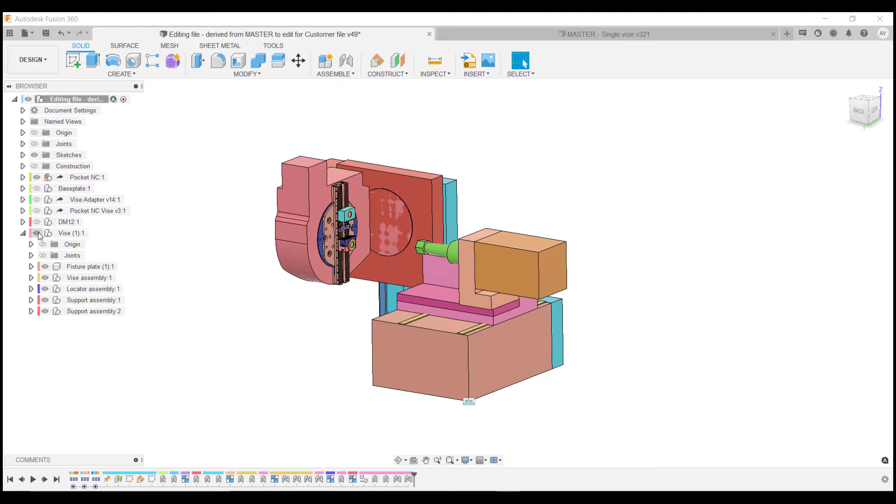Right, now I'll give you a brief overview of what's in the file and how it actually works. So I'll just hide that B-table offset sketch. First of all, you've got the Pocket NC itself. So I hide the Vise. That's the model that comes from Pocket NC. Hide that. Actually, I'll bring it back up.

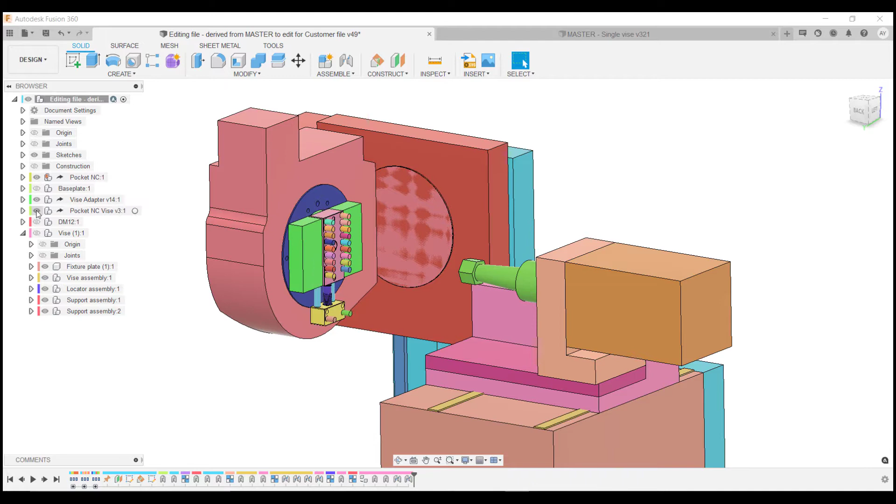Then you've got a base plate plus the DM12 dovetail fixture. I'll cover how that works in a separate video. And then you've got the Vise adapter and Pocket NC Vise, which are supplied by Pocket NC themselves. So even if you're not using my fixture plate, you can use this file for their Vise because it's all jointed and set up. So that just moves forward and back to grip a part.

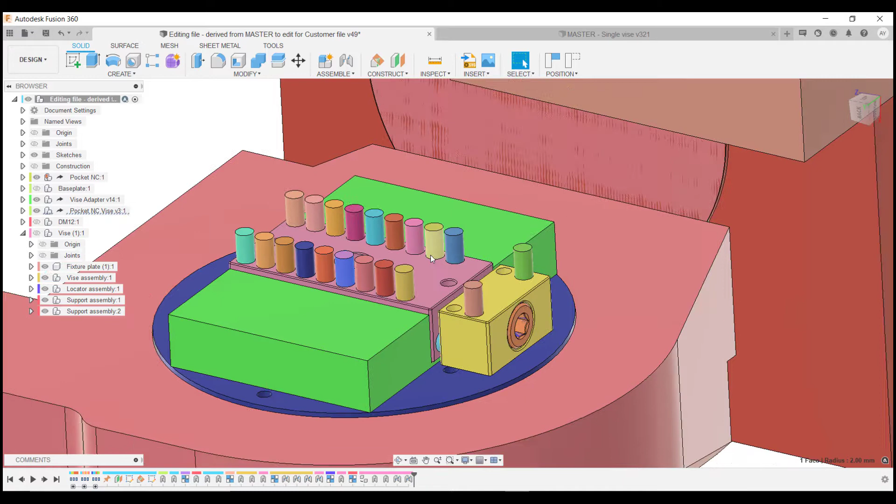And you'll find I've put these pins in, and you just hide them or make them visible as and when you need them. And then you've got my Vise. So if I hide the Pocket NC, the idea is that really you have to edit these last two joints to set this up. So you'll see they're fixed to the fixture plate, the teeth are fixed. The Vise moves like that, so everything you need is there.

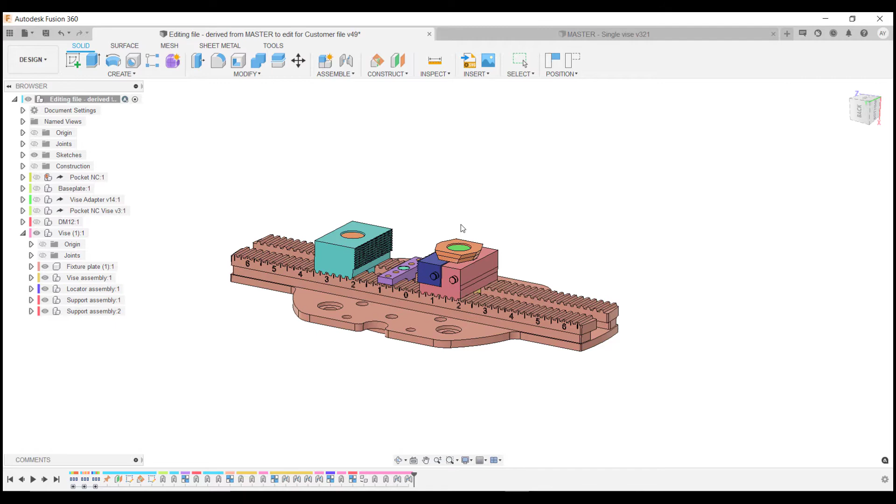You just have to set these last two joints, and what they're doing is just attaching the teeth at the corner on the Vise and on this component, which is called the locator, to teeth on the fixture plate. That's all it's doing. But the idea is that all the joints and everything are in here, so if for whatever reason you want to edit the file, you can. So I'll go through the individual components and the individual joints that you need to know about.

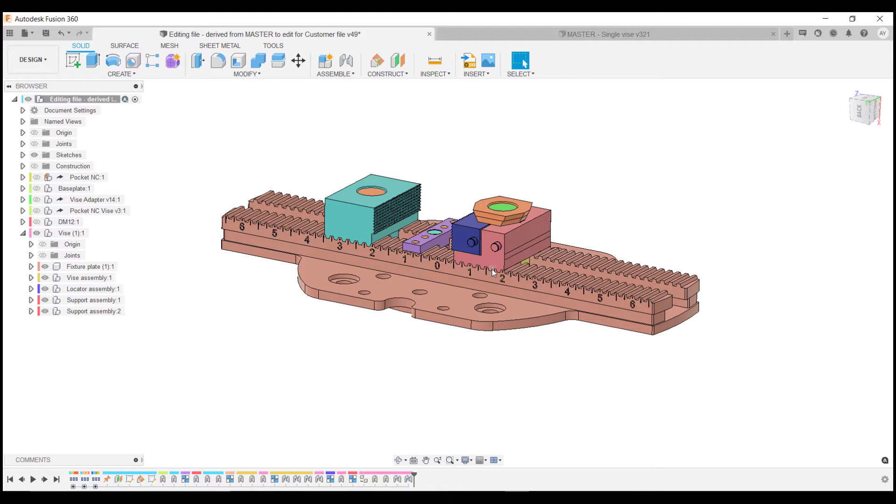First and probably most obvious is the fixture plate. Then there's the Vise Assembly, which is all the components for the moving Vise. So this is the moving part that grips on something. Then you've got the locator assembly, and then you've got two support assemblies. So the supports just go underneath whatever you're machining to stop it touching the fixture plate, so you don't potentially scuff up your fixture plate.

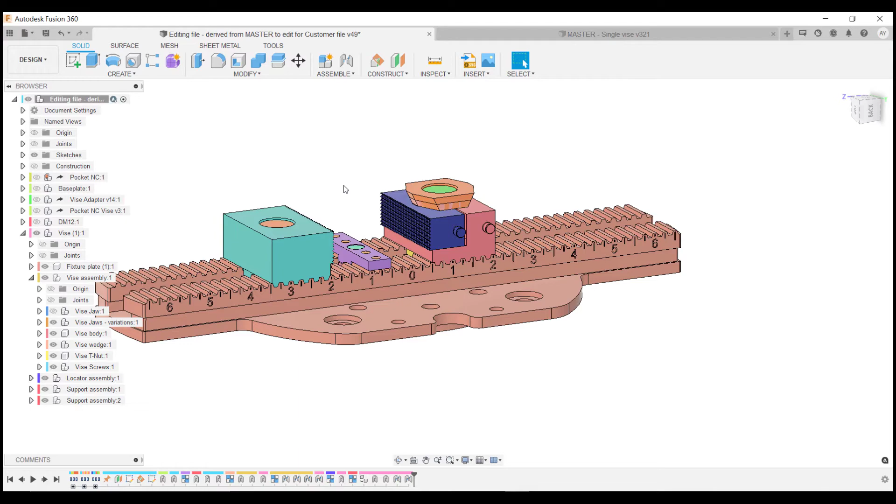So looking into the sub-assemblies in a bit more detail, you'll notice first of all you have a knurled jaw. So that's a gripper jaw made from steel, so it'll bite into whatever you're machining, and it'll ensure it won't move on the machine when you're cutting into it.

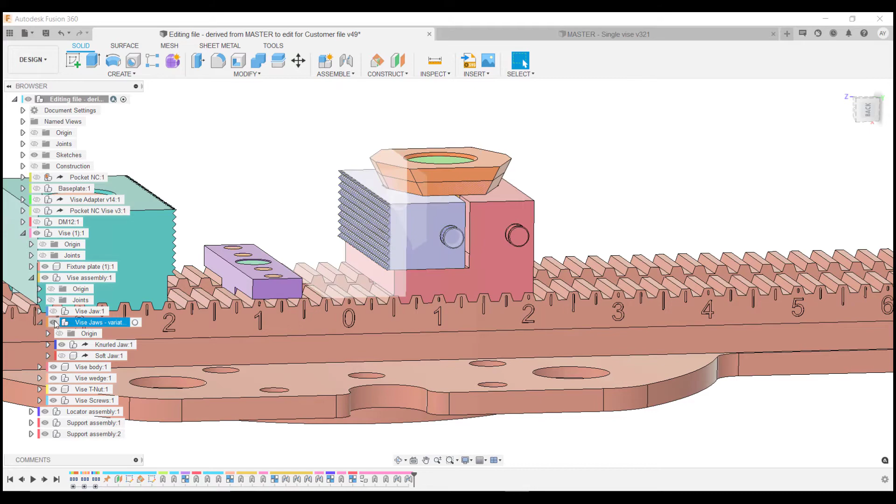You'll see that you've got several types of Vise jaw here. So you've got, if I bring this up, a bog standard flat jaw, which I don't actually sell. This is purely, I'll show you in another video, for setting up the Vise in CAD. It just makes life easier rather than trying to use this knurled jaw. And then you've also got a soft jaw. So two types of jaws really.

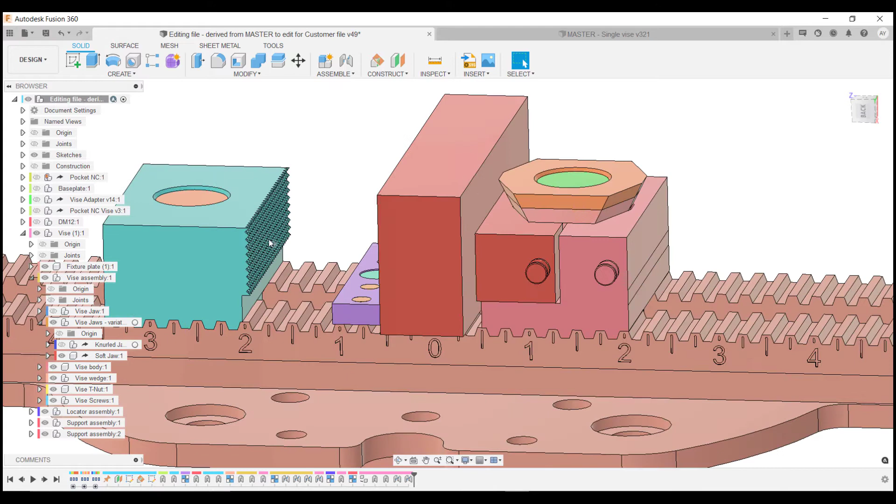There's the knurled jaw for gripping and preparing stock, kind of raw material. And then you've got this soft jaw which you machine into for doing second operations. And you'll see that the locator assembly has the exact same thing. So it's got this knurled jaw, and then it has a built-in soft jaw. The difference here is the locator, because it's one component, has it just built into the locator. So I'll quickly bring that up. There's the knurled jaw version, and there's the soft jaw version. So fairly simple.

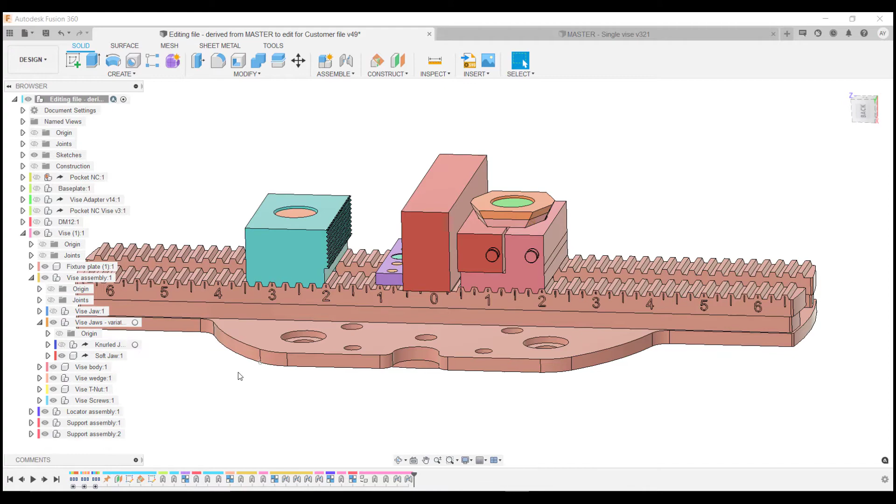Hide that again. So the Vise assembly is a bit more complicated because obviously it's got moving parts. If I undo these two joints, you'll see that they move forward and backwards. So the locator, everything is just what you'd call a rigid group. These are the symbols for rigid groups here. So it's all fixed together, and it's got a sliding joint, so it moves forward and backwards, and all you're doing with these final joints is just fixing the teeth. So that side's fairly simple. And the soft jaw version moves with it. I've closed it down, but you can see the soft jaw version comes up there.

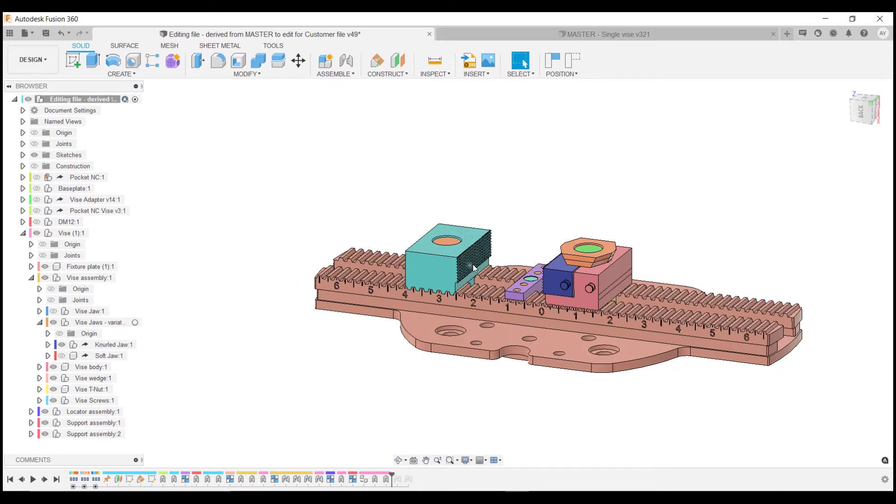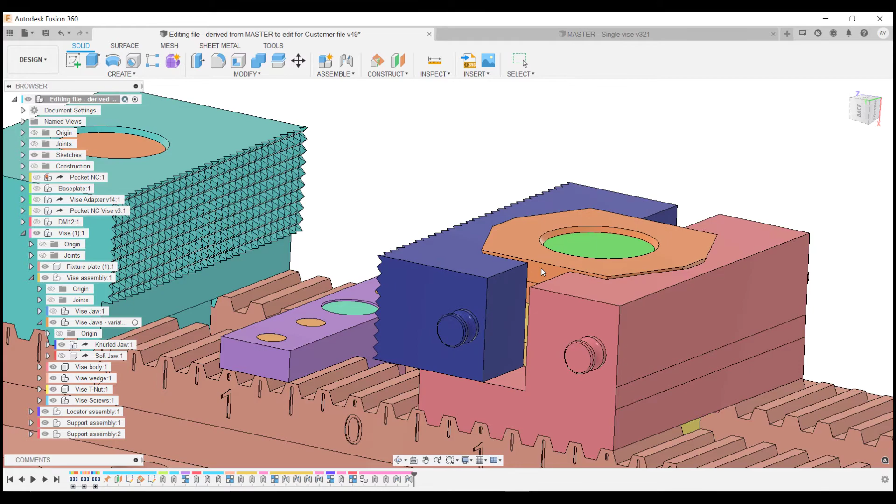The vise assembly is a little bit more complex because what you're doing is essentially tightening. This is a screw, so you tighten that down. It screws into this T-nut, which is in this T-slot, and as it tightens down, because it's wedge shaped, which is what I call them, wedges, vise wedges, as you tighten them down, it pushes the jaw out to grip whatever you're going to be machining.

Now, all those joints are set up. They're set up in here, so you don't have to worry about that. Again, you only have to worry about this final joint, which is fixing it to the base. Otherwise, it will move forward and backwards quite happily. So if I grab it there, you can see it does exactly as the locator assembly does.

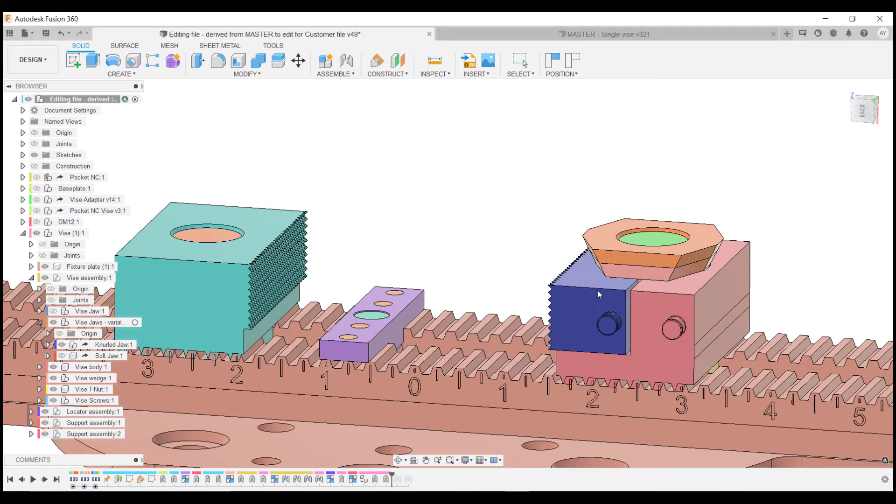But the one thing you do need to know is that there are different sizes of wedges. So these teeth, if I just bring up the inspect, you'll see there is 2.5 millimeters. So every time you move forward or backwards, you're moving this assembly forward 2.5 millimeters. So that means to be able to grip everything, you obviously need more than 2.5 millimeters of range.

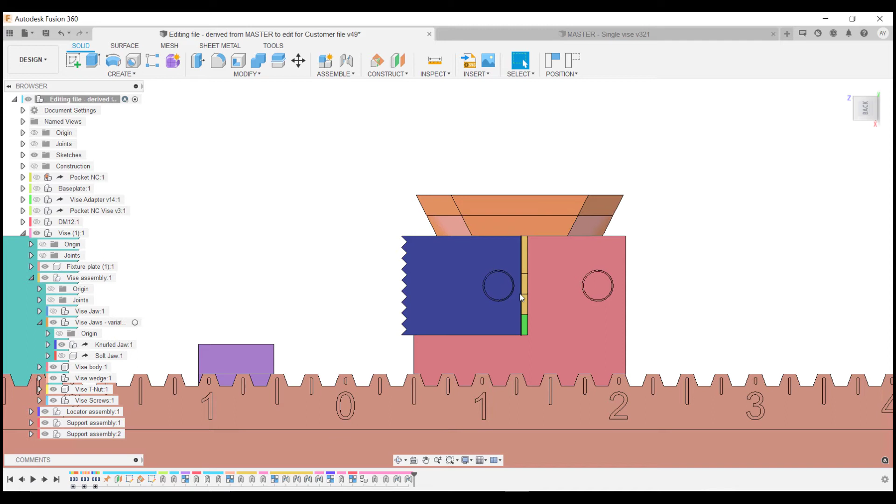Now, if I had made just one wedge, it would have basically meant I had to make quite a big, cumbersome assembly to allow it to have that range. Instead, what I've done is done 3 smaller wedges. So if I just open wedges, there you see them all. So what have I got there? I've got the largest wedge.

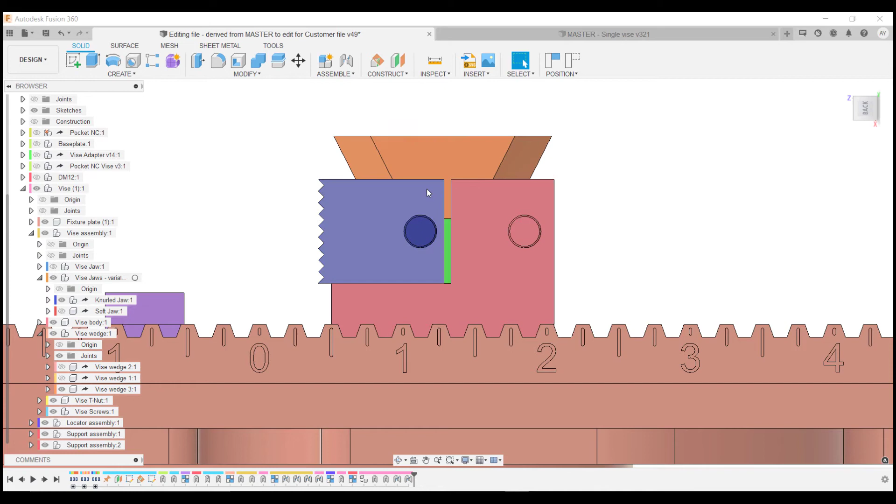So you see when it's in close, the largest wedge is sticking out, which isn't what you want. You want the wedge to have as much contact as possible with the inside face of this jaw and of this vise body. So when the jaw is in close, like this, say you're just gripping your stock there, what you want to do is use a smaller, that's the smallest one.

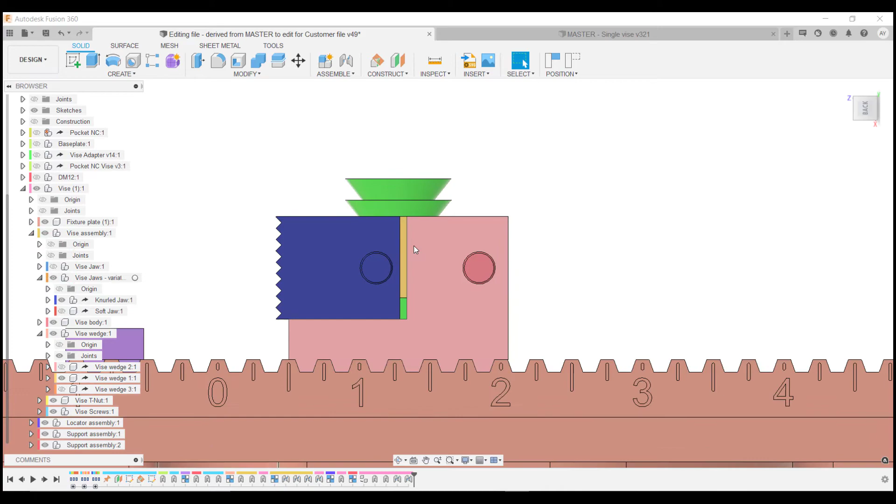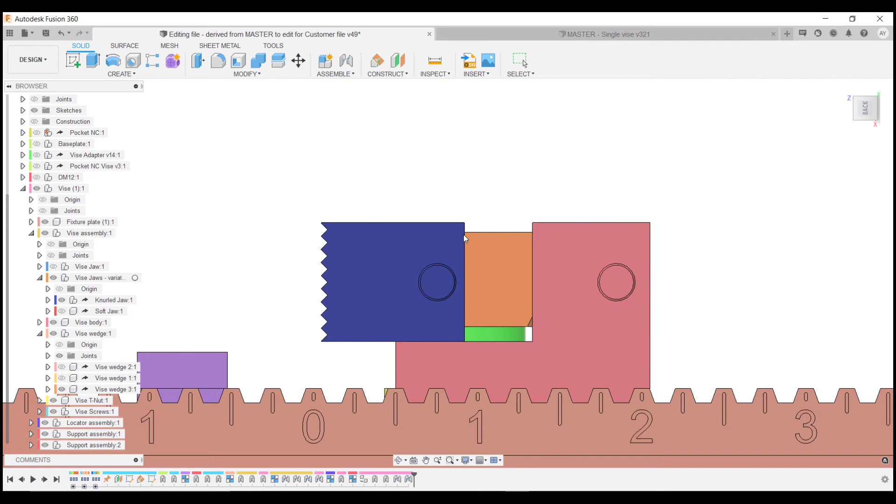So you'll see this moves down, but once you get to, if I go side on, once you get to there, you can see that it starts going through the bottom of this vise body. So that means once it gets to there, you need to use the mid-size version. And then if you go beyond that, use the large version. But what that does is give you way more than 2.5 millimeters of travel.

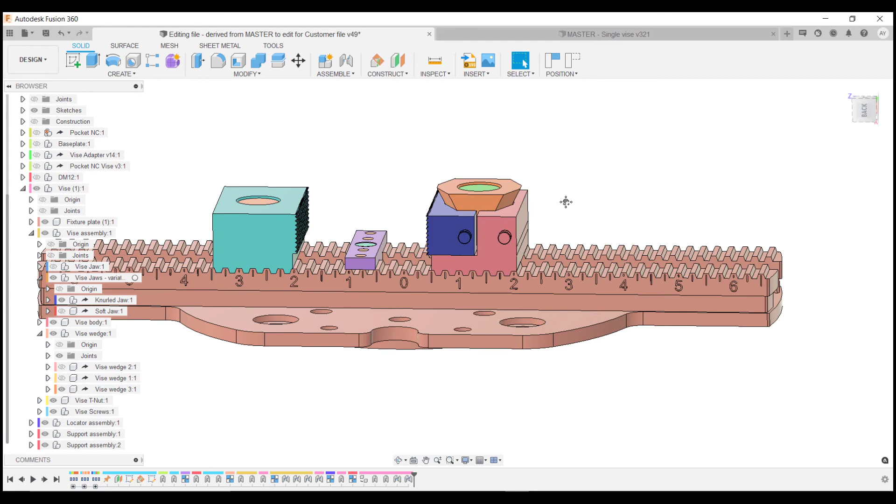You should really never have to use this large nut, because if you get to kind of there, you can just move the whole vise body forward one and use the smaller nut, and you'll only have to be tightening it a small distance. But it just gives you that range, just in case for some reason you need it. I'd rather you had it than miss it, as it were.

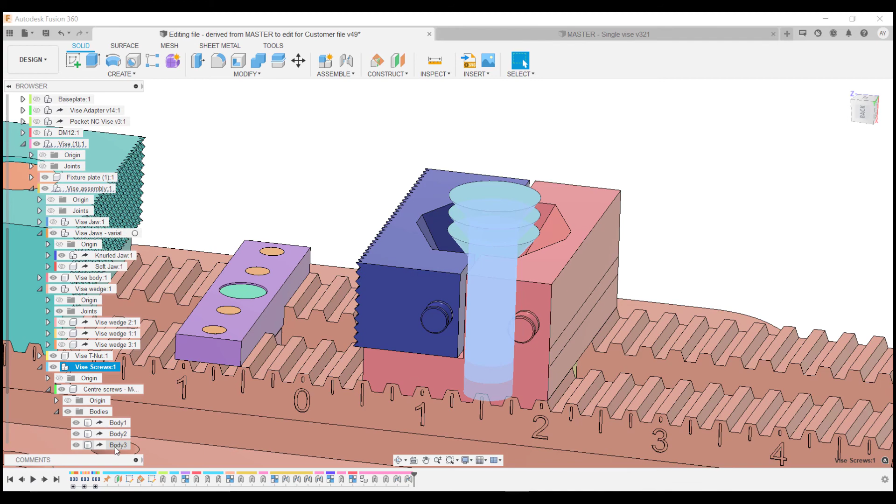So that's that. You'll see also when I hid the wedges, you can see you've got the 3 screws as well, so they're just present here. And they all move together, so just hide the ones you need. They're all in there, in the bodies. So just hide whichever ones you need and don't need. So if I come out of there.

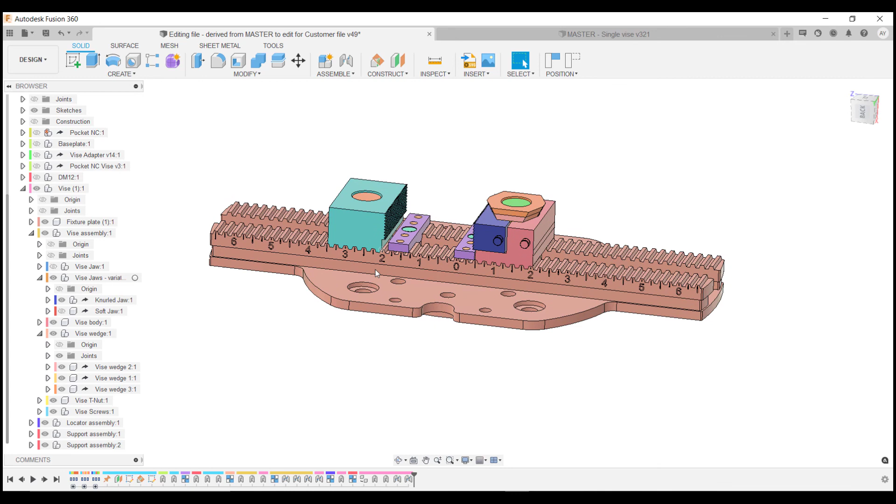And then finally you've got these supports. You've got 2 of them, 2 support assemblies. And you just move those around to support stock. So I'll show you how to do that in the next video, how to actually set up a piece of stock in CAD and grip onto it with the locator and the vise. But yeah, these 2 supports are just to put stock onto, so you're not going to damage your fixture plate.